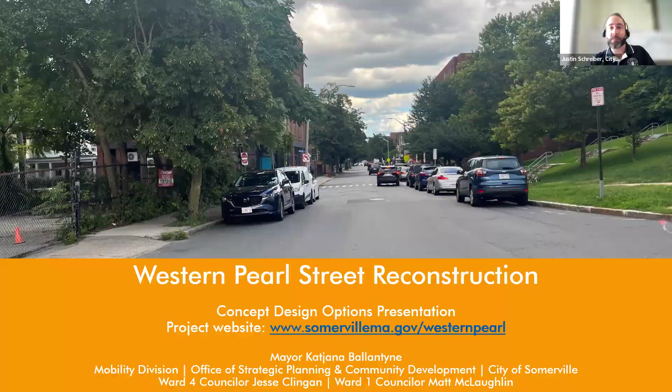For our presentation, we will first share a bit of information about who we are and what we do at the Mobility Division. Next, we'll talk about why Western Pearl Street was selected for construction and how our policy plans guide the design. We will then provide an overview of the project scope and anticipated timeline. Following that, we will share back some of the existing conditions data we have collected, as well as a summary of feedback we heard in the first phase of engagement last fall. We will also talk through some of the tools we can use to improve Western Pearl Street, then walk through two conceptual designs being proposed, and finally wrap up by discussing what's next and how you can continue to provide input into this project.

So first, who are we and what do we do? We want to start by introducing the team of city staff working on this project and discuss the values and guiding plans that we bring to our work on Western Pearl Street.

My name is Justin Schreiber, and I'm a senior planner with the Mobility Division. Also from Mobility, we have Viola Augustin, senior planner, and Kate White, transportation planner for outreach and engagement. We'll be working closely with the engineering division of the Department of Infrastructure and Asset Management, who will be responsible for the construction phase of this project. This includes Rebecca Wright, Senior Project Manager for Streetscapes, and Brian Postlewaite, Director of Engineering.

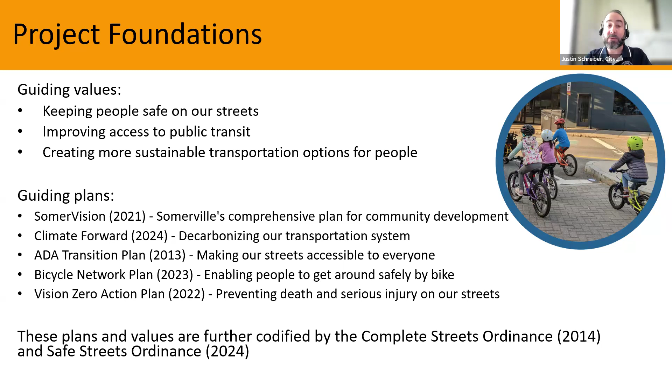Now I'll turn it over to Viola to talk about why this project was selected. Thank you, Justin. There are a few reasons why we are reconstructing Pearl Street from Medford Street to McGrath Highway right now.

Selected streets are categorized by project type. Complete street and intersection projects are full street reconstructions that include a complete reevaluation of street design to improve safety and access for all users. In full street projects, generally the surface of the street is renewed, but only minor traffic safety improvements are incorporated. In sidewalk-only projects, the city is simply reconstructing the sidewalks to be fully accessible. In curb-to-curb paving projects, the city is repaving the full roadway. And finally, in partial paving projects, the city is just repaving the travel lane areas of the roadway.

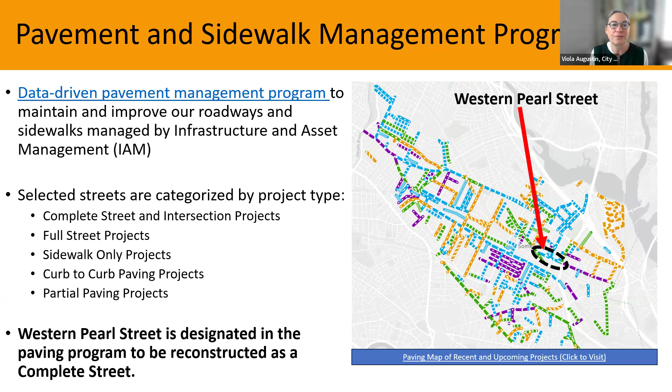The plan was further codified by the City Council's Safe Streets Ordinance in 2024.

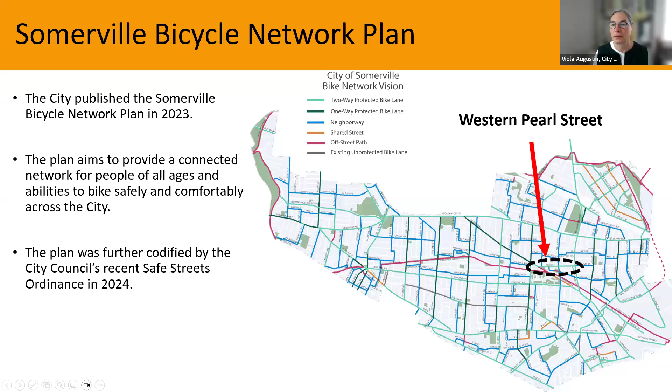We can see Western Pearl Street is designated for protected bike lanes in both directions, and it is on the priority network of streets to be implemented by 2030. Because of the narrow width of Pearl Street, providing bike lanes in each direction requires removal of all parking or one-waying the street. In our first round of outreach in the fall of 2024, we presented these two options and a third one to only provide a protected bike lane in one direction and keep parking on one side.

We asked community members to share thoughts and feedback. Later in this presentation, Kate will tell you what we heard from the community.

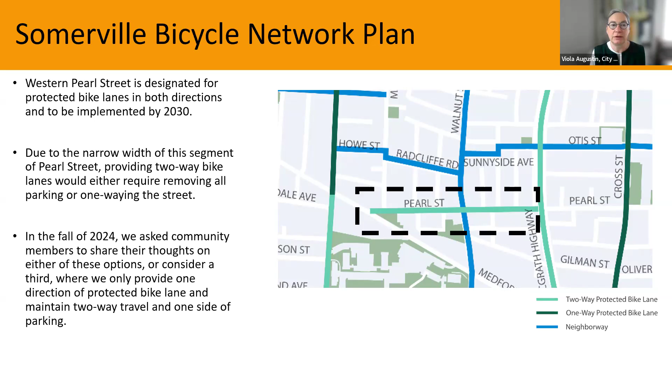What is the project? First, we want to clarify the scope. As shown on the map, the project will reconstruct Pearl Street from Medford Street to McGrath Highway. The intersection of Medford Street and Pearl Street is included. However, the project ends before Dana Street at the McGrath end.

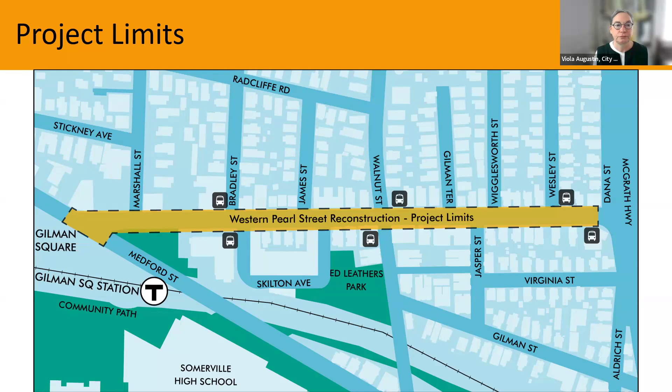Included in this project are reconstruction of sidewalks and curb ramps, repaving of streets from curb to curb, new tree plantings and landscape areas, new and raised crosswalks and intersections, traffic calming, traffic signal evaluation, designated bicycle facilities, bus stop changes, changes to lane widths, and increasing visibility at crossings.

What we can consider is parking regulations and traffic calming on nearby streets. What is not included in this Complete Streets project are substantial utility work, street lighting, network redesign, and green stormwater infrastructure.

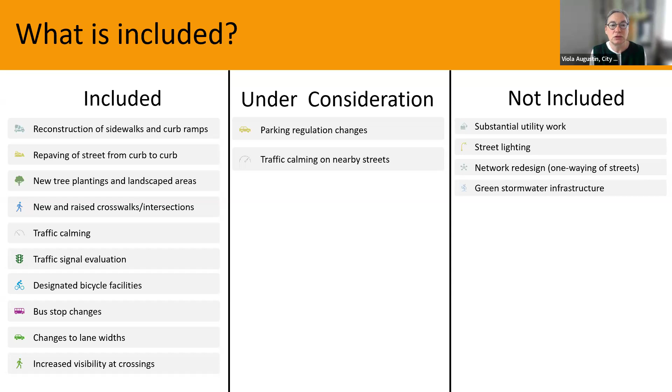In December of 2024, we started working with a consultant to develop 25% designs. The design development we are now sharing with the public, starting with an open house meeting we had on May 13th. After the second round of community outreach to get feedback on the proposed design in May and June, we anticipate developing one design to 80% completed, anticipated completion in July and August.

In September, we are planning to come back to the community with this 80% design. Again, we will be asking for feedback in September and October. Final 100% designs will be developed after that, until approximately the end of the year.

We then aim to introduce the 100% design at the beginning of 2026, and at the same time we are seeking bids for contractors. Construction is then anticipated to take place between spring of 2026 through the fall of 2027.

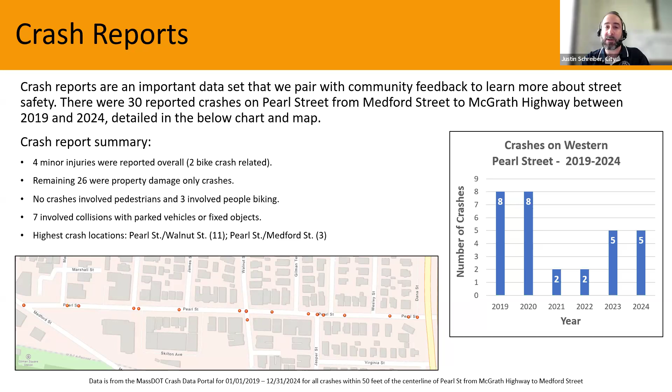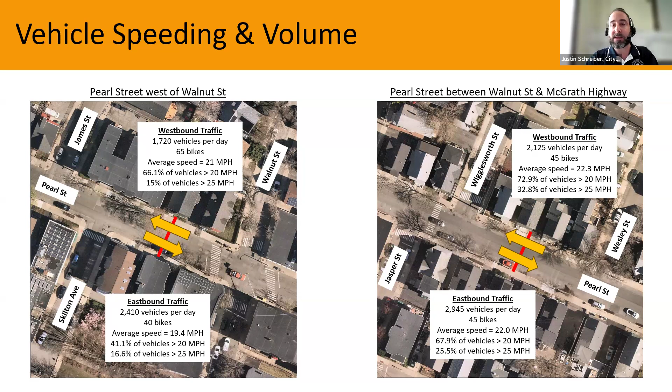The data also shows that a majority of people driving exceed the 20-mile-per-hour speed limit on Pearl Street, ranging from 41% to almost 73%, depending on location and direction. Between 15 and 33% of vehicles also exceed 25 miles per hour. Speeds appear to generally increase closer to McGrath Highway, and at both these locations, outlier speeds as high as 50 miles per hour were recorded.

We also collected data on crosswalk compliance and red light compliance. Over the course of 1 hour at 3 unsignalized crosswalks, 9 pedestrian vehicle interactions were observed, with 7 vehicles yielding and 2 vehicles failing to yield. And then again, over the course of 1 hour at the Walnut Street intersection, 1 vehicle ran the red light during the pedestrian phase. The study likely has too few data points to draw firm conclusions, but it is presented for context.

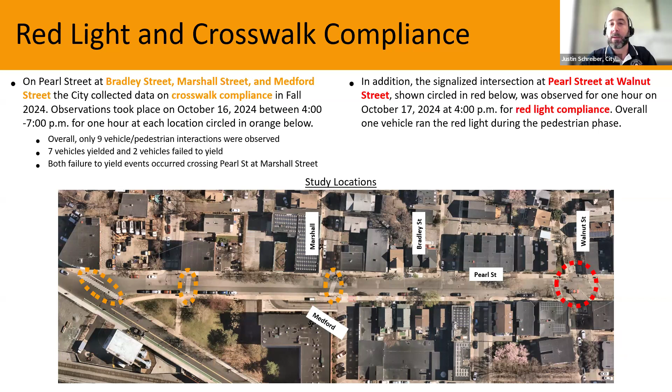Western Pearl Street is currently served by the MBTA 80 bus, which runs from Lechmere to Arlington Center about every 45 minutes during peak hours and about every 60 minutes off peak. On a typical weekday, approximately 200 people either started or ended a bus trip at the 3 stop pairs in the project area. In the outbound direction towards Arlington Center, the most popular stop is at Walnut Street with about 24 riders per day on weekdays.

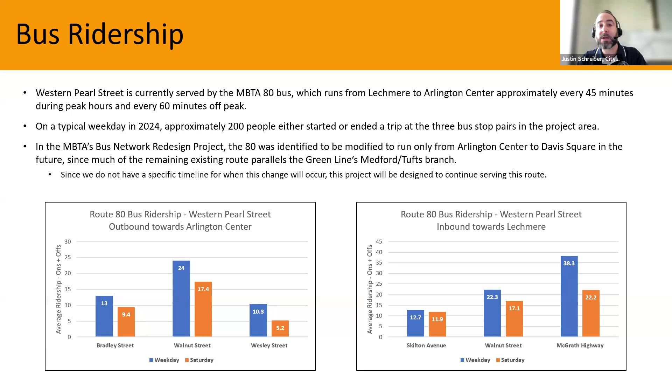And in the inbound direction toward Lechmere, the McGrath Highway stop is the most popular with about 38 riders per day on weekdays. In the MBTA's bus network redesign project, the 80 bus was identified to be modified to run only from Arlington Center to Davis Square in the future and not all the way to Lechmere, since much of the remaining existing route parallels the Green Line's Medford Tufts branch. However, since we don't have a specific timeline for when this change will occur, this project will be designed to continue serving this route.

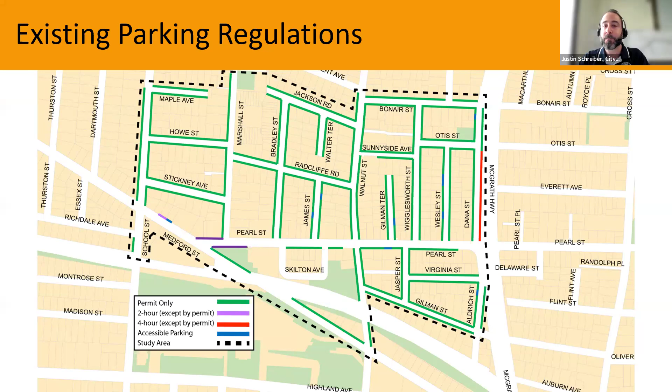The study area surrounded by the dotted black line includes capacity for approximately 750 vehicles across 29 different street segments. Overall, in the study area, about 80% occupancy was observed during that time, with 609 spaces occupied and 148 spaces available. We also saw that occupancy varied widely by street segment.

13 of the 29 street segments have 5 or more spaces available. 11 of the 29 street segments had between 1 and 4 spaces available, and 6 of the 29 street segments were at or over capacity. This study is not an exhaustive evaluation of parking in the neighborhood, but it does show that at a neighborhood level, at one of the highest occupancy times of the day, there remains available parking on many streets. However, this availability is not evenly spread, and there are a number of street segments at or over capacity.

I will now turn it over to Kate to provide a summary of our first phase of engagement.

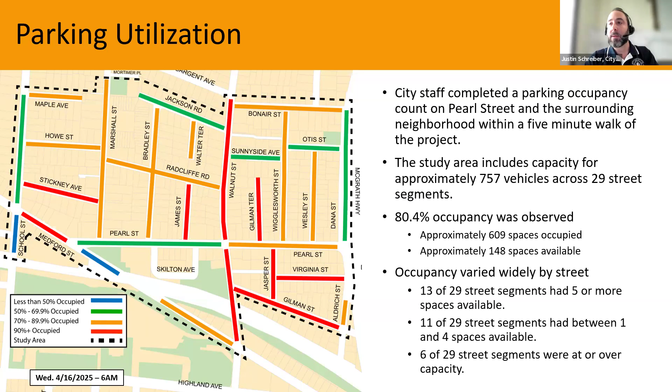Thanks, Justin. So from July 19th to November 20th of 2024, we worked to engage community members in this project. We aim to spread awareness about the construction project, including the opportunities and limitations in a pavement and sidewalk management program project, hear insight into how the streets in the project are used, learn about community members' transportation safety concerns, understand preferences among three design options, and gather feedback on ways to make the streets safer, more accessible, more sustainable, and more comfortable for all people traveling on the street.

If you'd like to learn more about how we engage community members and what we heard, please check out our pre-concept community engagement report available at somervillema.gov/WesternPearl. Over the next couple of slides, I'll provide highlights of our engagement activities and what we heard.

First, I'll focus on what we did. In the summer, we gathered with youth empowerment and climate justice organization Groundwork Somerville to host 3 street design workshops together, gathering young adult insight on safety issues and priorities for Pearl Street.

We then launched the larger pilot project by broadcasting the project overview and virtual community meeting details in tools like our mobility monthly newsletter on September 4th, sharing flyers at Mayor's Senior Picnic and Gilman Square Arts Festival, posting flyers on over 200 homes in the project area, and sending email notifications to City Alert subscribers within the project area.

In early October, we hosted the first community meeting and followed this with an outreach pop-up at the intersection of Medford Street and Pearl Street to spread the word about the project and again collect community feedback on their safety concerns and ideas. We hosted a dedicated on-site meeting for Pearl Street Park residents in mid-November and visited with small businesses with storefronts in the area.

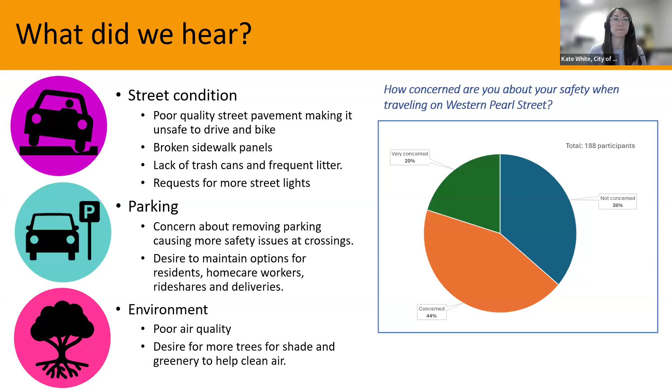Diving into some of the input we heard about specific intersections at Pearl Street and Medford Street, some of the major highlights included a desire to reduce speeding, increase stop sign compliance, and create a safe crossing across Medford Street, as a lot of people want to cross this location and there's not a crossing at this time.

Community members shared their concerns about low stop sign compliance on Pearl Street and described that there is poor visibility for people driving.

We heard requests for tools such as rectangular rapid flashing beacons, or RRFBs, or traffic lights.

Nearby, we also heard a lot of input about Pearl Street and Marshall Street. People described how they feel people don't yield to pedestrians trying to cross at either location. People also described how vehicles often sit on the crosswalk across Marshall Street to see other motor vehicles, rather than paying attention to pedestrians trying to cross.

We heard requests for tools such as raised crosswalks or RRFBs. And at Pearl Street and Walnut Street, we heard requests to move the crosswalk closer to the intersection, more in line with the desired path of travel, since it's currently set back. Some requested a raised intersection at this location. We heard concerns about red light running and aggressive driving behavior through the intersection, and some advocated for maintaining the signals there because they feel safer having their children cross at an intersection with traffic signals.

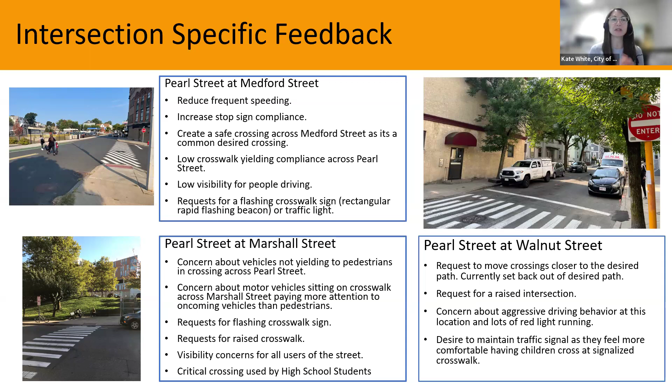So that's some of our intersection-specific feedback. We want to share some feedback we received about the three design options we presented last fall.

As Viola described earlier, Option 1 focuses on providing protected bike lanes in both directions, with flexible space—which precludes considering parking, curb extensions, wider sidewalks, and tree bump-outs. Option 2 offers one-way traffic in the street, providing protected bike lanes in both directions and flexible space for wider sidewalks and tree bump-outs. Option 3 includes a protected bike lane in one direction, flexible space, and two-way motor vehicle traffic.

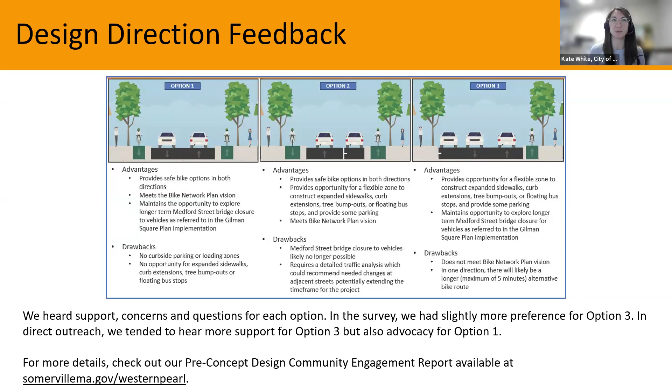We go into detail about what we heard regarding these three options in our pre-concept community engagement report, but in this presentation we'll highlight some of the major reasons people shared when picking an option preference.

We wanted to share what we heard across the board in our survey. About 25% preferred Option 1, 22% preferred Option 2, and 29% preferred Option 3. In direct outreach, we tended to hear support for both Option 1 and Option 3.

Some reasons folks preferred Option 1 were that it fulfilled the commitment in the Bicycle Network Plan and Safe Streets Ordinance, and provided bike facilities that could ease demand on the community path and connect to future protected facilities on McGrath Boulevard. Community members shared that they didn't want to prioritize parking over safety, and some were concerned about a one-way street removing the option to close the Medford Street Bridge to motor vehicle access.

Some reasons folks preferred Option 2 were that they supported reducing overall motor vehicle volume on the street. They liked having protected bike lanes and flexible space to enhance the pedestrian environment and transit experience, and hoped it could make the street feel more like a residential street.

Some reasons folks preferred Option 3 were concerns about no pullover space for deliveries and rideshares, which could encourage drivers to park in future protected bike lanes or block traffic.

Some who identified as bike riders living on or near Pearl Street described being satisfied with the existing Gilman Street neighborway as an east-west biking connection under McGrath Highway. They were more interested in strengthening that connection and the Marshall Street contraflow options, in addition to considering more traffic calming in the area.

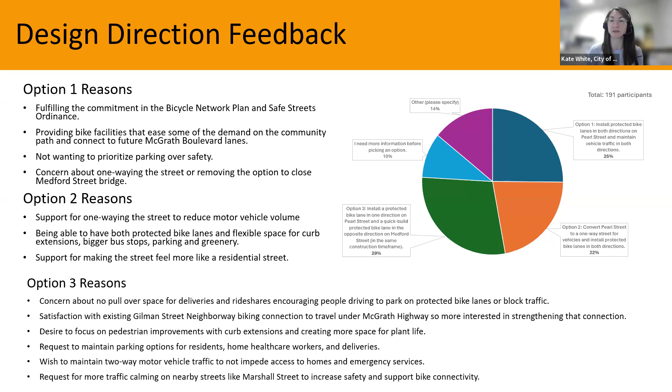Many wanted to focus the design on pedestrian improvements, with curb extensions and more space for plant life. Many requested maintaining parking options for residents, home health care workers, and deliveries. Some wished to maintain two-way motor vehicle traffic because they didn't want emergency services impeded or to have to always use McGrath Highway to access their home by car.

With all of that, we want to share what designs are being proposed. We'll first focus on some of the tools and features we can use to increase safety—specifically tools we can use in resurfacing projects.

One of our favorite tools we're excited to use in resurfacing projects is raised crosswalks at intersections. These make crossing the street safer and more comfortable. Since they're elevated to sidewalk height, drivers must slow down as they approach the crossing, and they also enable people using wheelchairs and other mobility devices to cross more easily, since you don't have to ramp down and back up.

Curb extensions are another tool that extend the sidewalk at the crossing to shorten the distance from one side of the street to the other.

They also help people driving to see people crossing and other vehicles by preventing vehicles from parking too close to the crossing. Another tool is our rectangular rapid flashing beacons, or RRFBs, which are push-button activated flashing crosswalk signs.

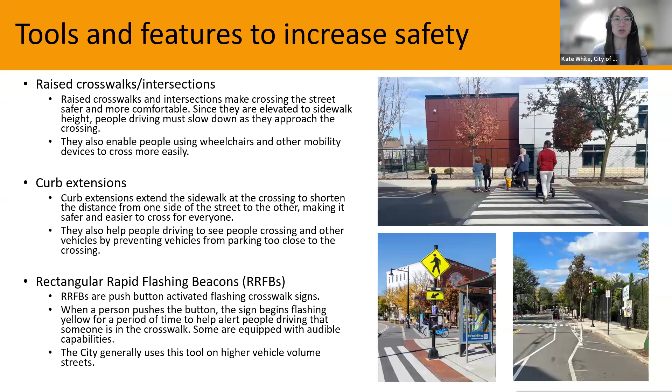Some other tools we can use are floating bus stops. These are sidewalk extensions that provide dedicated waiting space for bus riders outside the paths of travel for people walking, rolling, and biking. They streamline bus service and improve accessibility by enabling the bus to stop in the travel lane rather than having to pull over.

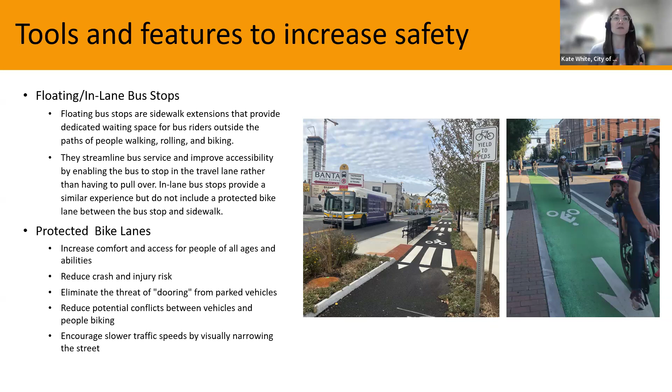In-lane bus stops provide a similar experience, but do not include a protected bike lane between the bus stop and the sidewalk. Protected bike lanes are another tool, and they increase comfort and access for people of all ages and abilities. They reduce crash and injury risks and eliminate the threat of dooring from parked vehicles. They also encourage slower traffic speeds by visually narrowing the street.

Another tool is clear corners. Parked vehicles near crosswalks can block views of people crossing the street and people driving on intersecting streets. So parking within 20 feet of a crossing is not permitted under local, state, and federal guidelines. By installing what we call clear corners, which includes using pavement markings and sometimes tools like flex posts, we restrict the parking ahead and can increase visibility for all users, as depicted in this visual where the cars are removed from the crossing and you can now see the children crossing and the people in the parallel crossing. This tool also helps reduce the likelihood of crashes.

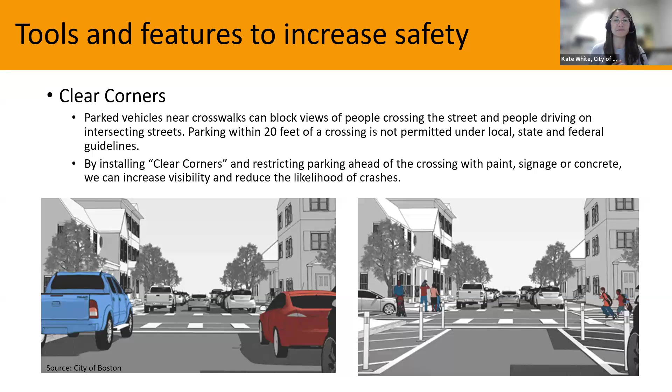The last tool I'll describe today is our parking regulations. We can change or adjust the types of parking we have available in the area by rethinking the regulations. At the next design update later this year, we'll share proposed parking regulation changes. This includes which side of the street parking will be located on, as well as changes to parking regulations to address the feedback we've been hearing about parking needs.

Regulation changes could include new accessible spaces for general use, new loading zones for business use and/or passenger pickup or drop-off near larger apartment buildings. We can have more 2-hour or 4-hour parking for users like visitors, customers, or home health aides. And we can consider parking meters to encourage turnover at high demand locations. In some cases, side streets could be used to meet demand for different regulations.

So that's a whole bunch of our tools. I'm now going to hand it over to Viola to share more about our proposed concept designs.

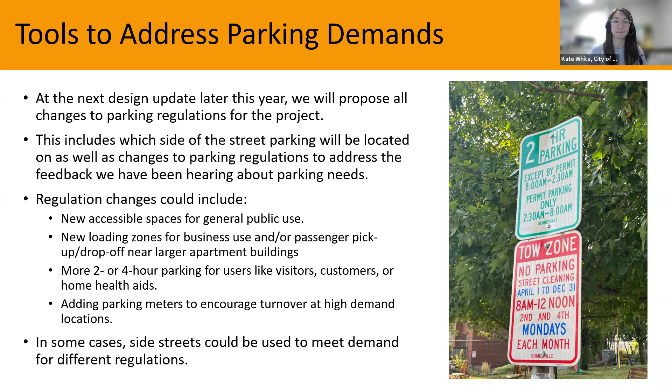Thank you, Kate. So now that we heard about safety tools we can use to improve safety, we want to go through two different ways or concepts that we propose to apply these tools throughout Pearl Street. Before we address the design details, I want to point out that we can combine parts of concept 1 with parts of concept 2 for the final design.

What that means is that if you like, for example, a bus stop treatment in one concept, but like the bicycle circulation in another concept, we can take that into consideration when we move towards one final design. So when you give feedback, please keep that in mind.

That said, both proposed concepts address many of the concerns we heard about. We are proposing curb extensions, raised crosswalks across side streets, and raised crosswalks at non-signalized intersections across Pearl Street to create safer intersections and crossings.

Both proposed concepts keep, wherever possible, parking on one side of the street, not unlike what you currently find on Pearl Street. You will see improved bus stops in concept 1 and concept 2. For example, some bus stops will remove conflicts with bike lanes, and some eliminate the need for buses to pull in and out of the travel lane, or in-lane bus stop, as Kate just described.

The two concepts also show two different treatments for bicycle infrastructure, but both have a continuous protected bike lane throughout most of Pearl Street, with one section of bike lanes in both directions. Now, before taking a look at what distinguishes both concepts, we want to explain why we made a decision to move forward with a combination of two-way bicycle lane and one-way bicycle lane.

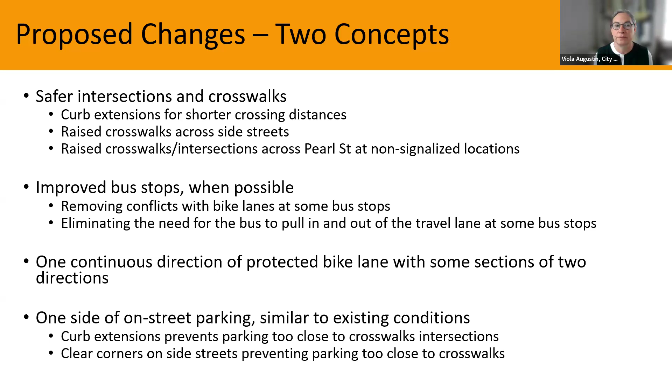All of our designs put safety first. Safety impacts have priority for all our street improvements. In addition to safety for vulnerable users of the street, we work with the fire department to ensure that they can operate in a fast and efficient manner.

Learning from other projects, we concluded that providing no curb access on Pearl Street would create significant safety issues. One option to achieve a continuous bike connection in both directions would be to one-way the street. This would force many residents living on one-way streets in the neighborhood onto McGrath Highway, and it would impede fast and efficient emergency operations. By choosing a design with a protected bike lane in one direction and an alternative route through adjacent residential streets in the other direction, we can build a safer street for every user.

We are able to incorporate sidewalk improvements, create a better pedestrian environment, and keep most parking on one side of the street.

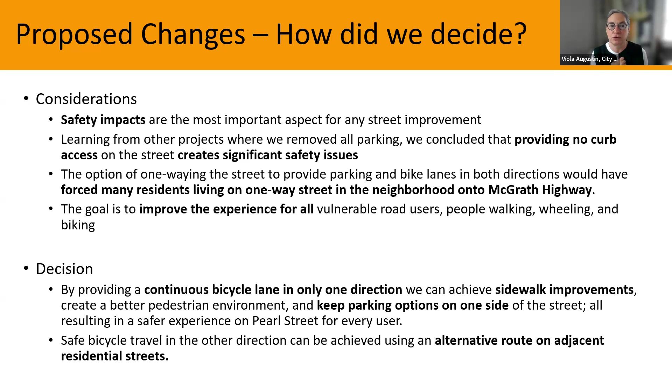So let's look closer at the two concepts and what we're proposing for bicycle facility configuration.

As you can see on the two maps, concept one has a continuous bike lane going eastbound from Medford Street to McGrath Highway. A two-way bike lane, shown in the green arrow, connects Medford Street and Skilton Avenue. After that, bicycle riders go eastbound, continuing on Pearl Street, indicated with the light blue arrow. Riders coming from McGrath Highway going westbound, shown with the red arrow towards Medford Street, turn left from McGrath Highway into Albright Street. From there, they turn right onto Gilman Street, then continue on this existing neighborway connection across Walnut Street, through Ed Leather Park, and travel on Skilton Avenue to come to the just mentioned two-way bicycle lane on Pearl Street connecting to Medford Street.

Concept 2 proposes a continuous bike lane going westbound, indicated with the red arrow, and eastbound travel from Medford Street, shown again with the light blue arrow. We are proposing for people riding bikes to continue up Medford Street Bridge, where they will turn left onto the community path until Walnut Street. They turn left onto the existing two-way bike lane and then right onto the current Gilman Street neighborway until Jasper Street, where they will turn left, then turn right on Pearl Street to the protected bike lane all the way to McGrath Highway.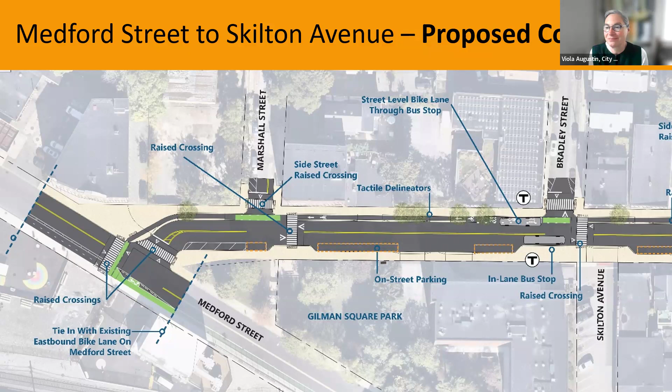Switching over to Concept 1, you can see the treatment for this section of Pearl Street, again between Skilton Avenue and Jasper Street. There is a sidewalk level, 1-way separated bike lane on the south side of Pearl Street, headed eastbound toward McGrath Highway. The bike lane returns to street level to cross Walnut Street and to pass through a bus stop, and then it returns to sidewalk level.

Raised crosswalks are shown across all side streets, as well as curb extensions into Pearl Street on the north side of the intersection to prevent people from parking too close to intersections.

At Walnut Street, curb extensions are shown on the north side, on both sides of Walnut, reducing crossing distances across Pearl Street. The westbound bus stop at Walnut Street is relocated after the intersection at one of these curb extensions.

This is an in-lane bus stop so that the bus does not need to pull in and out of the travel lane. Locating the bus stop so that the bus proceeds through the intersection before stopping allows it to operate more efficiently, since it does not need to stop twice, once at the bus stop and potentially again at a red light. This is known as a far side bus stop.

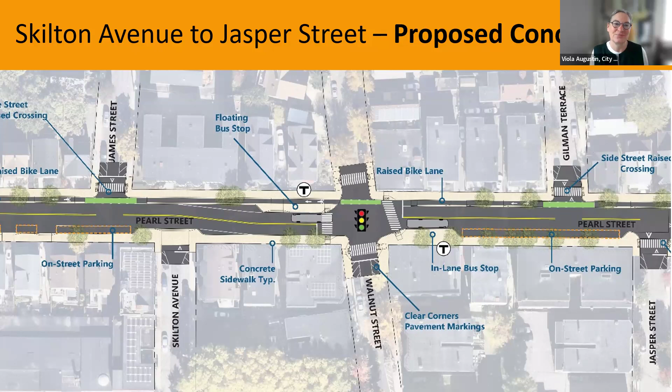Thank you, Justin. So the last section of Pearl Street is between Jasper Street and McGrath Highway / Dana Street. As we mentioned previously, the scope of this project ends at Dana Street. However, we are communicating with the DOT team to ensure that our designs will work with future changes on McGrath Highway. In this section, you see there's currently no parking on the north side and some parking on the south side closer to Jasper Street.

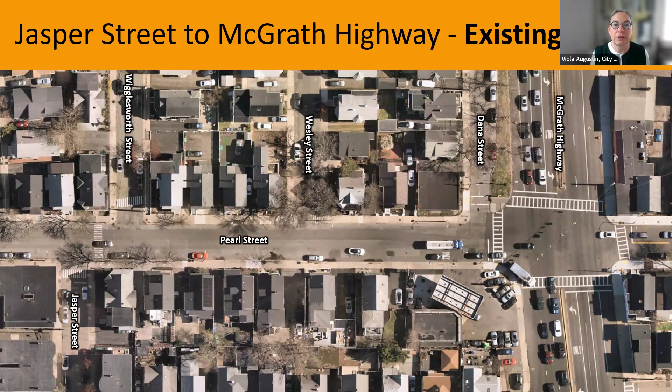The westbound bus stop on the north side is right before Wesley Street, and the eastbound bus stop on the south side is right across that.

In concept 1, the protected bike lane continues eastbound on sidewalk level until right before the intersection to McGrath, where it transitions to street level and shares the lane with the pullover bus stop. The bus stop for the bus heading west towards Gilman Square stays in the same location as where it is now, but a curb extension creates more space for waiting and allows for easier bus operations as the bus does not have to pull over.

The bus stop eastbound moves closer to McGrath Highway, away from residential driveways, and it will be in front of the gas station. Parking shifts to the north side in this concept. Raised crosswalks are added across all side streets, Wigglesworth, Wesley, and Jasper Street, and the right turning lane is eliminated. Again, this is coordinated with the DOT team for the McGrath Highway project.

Concept 2 proposes a bike lane in each direction in this section. The same bike lane treatment as in concept 1 is shown on the south side, going eastbound. That is on sidewalk level between Jasper Street and the bus stop, and then it turns into a shared lane with the bus stop on street level in front of the gas station at the intersection of McGrath Highway.

On the north side, we propose to continue a sidewalk level bicycle lane from Wigglesworth Street until the westbound bus stop at the corner of Dana Street, where it then goes onto street level. Same as in concept 1, all side streets show raised crosswalks and the right turn lane onto McGrath Highway is gone.

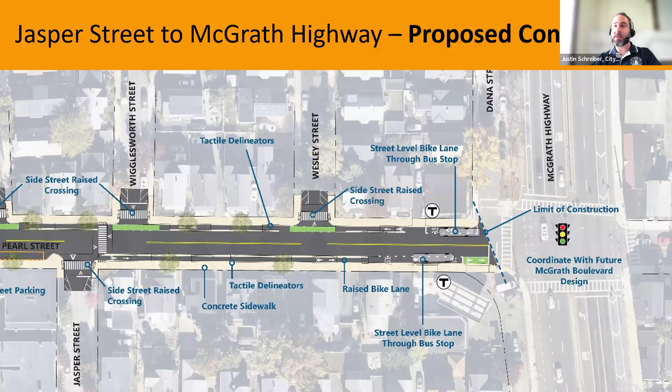Now, with all that information just shared, Justin will give an overview of all of them. Thanks, Viola. So that was a lot of information. So this next slide is really trying to summarize the major differences between the two concepts that we presented just now.

So first, the bike circulation. In concept one, it's primarily an eastbound bike lane, except for a two-way section between Medford Street and Skilton Avenue, which is shown as a two-way bike lane on the south side of the street. And then again, to serve the westbound direction of bike travel, we have proposed a route that uses a short section of McGrath Highway and Aldrich Street, and then the Gilman Street, Skilton Ave neighborway to connect up to the two-way facility on Pearl Street.

In comparison, the bike circulation in concept two is primarily a one-way westbound bike lane, except for a two-way section between Jasper Street and McGrath Highway, shown as two one-way bike lanes on each side of the street. To serve the eastbound direction, we have a proposed route that uses Medford Street up the bridge, one block of the community path, the existing two-way bike lane on Walnut Street, and then back to Gilman Street neighborway and Jasper Street to connect to the short section of one-way eastbound bike lane on Pearl Street.

Moving on to parking, concept one shows parking on the westbound or north side of the street, while concept two shows parking on the eastbound or south side of the street. The parking is always on the opposite side of the street from where the bike facility is.

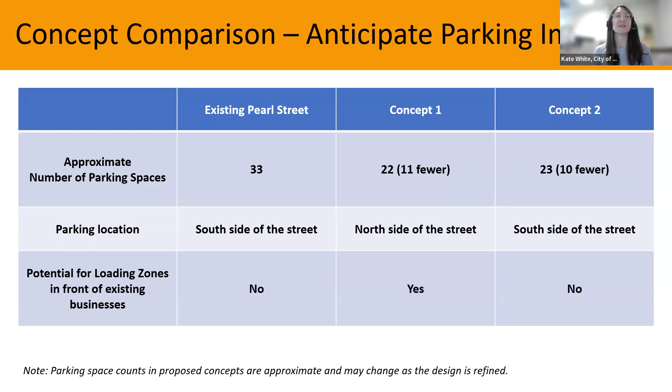Thanks, Justin. I'll now describe some next steps. We want to talk through how your input will shape this project. We really want to hear from you, including your feedback on the concept designs we've presented in this phase.

So from May to June, please share with us which concept you prefer and if you have any specific preferences for the different intersections and circulation options. We also want to hear your overall feedback and questions on the proposal.

As Viola described earlier, we'll work over the summer to incorporate this feedback into the updated design. So when we come back in the fall, we'll bring that updated design back to you to gather feedback on whether we met our goals and if we're missing any more details before we finalize and work towards construction.

Then into next winter, we'll share the final design as we work to attain a contractor and get a construction schedule. At this stage, when we're going out to bid for that contractor, we won't be collecting feedback to make changes to design, but focusing more on fielding clarifying questions.

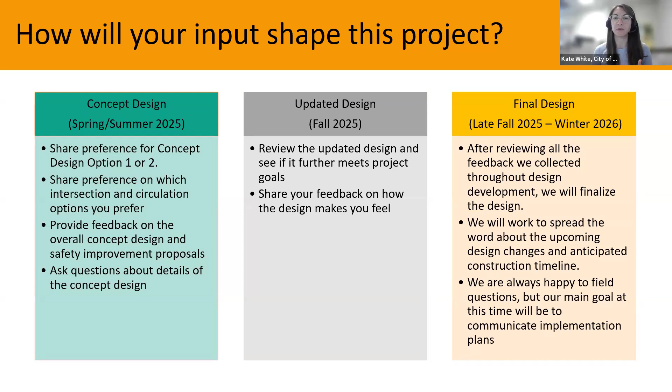We want to highlight the overall picture of all the different ways we aim to engage community members. We spoke about some of those we shared when preparing to develop the concept design. We'll continue to use similar tools, such as virtual office hours, tabling at local community events like Carnival coming up on June 1st, in-person direct outreach, and online survey opportunities. We'll also continue to connect with our transportation-focused city advisory committees and spread the word about the project in major city communications channels. So what comes next?

From now until June 13th, please consider taking our concept design feedback survey. This is available at somervillema.gov/WesternPearl, and it's available in English, Spanish, Nepali, Haitian Creole, traditional Chinese, and simplified Chinese.

If you prefer to take this over the phone, please don't hesitate to call 311. They'll log it with a member of our staff who will then return your call and take the survey with you.

Consider coming and talking to us. We've got some outreach pop-ups on May 19th from 4:30 to 6:30, and we'll also be tabling at Carnival from 2 p.m. to 6 p.m. on June 1st.

We're hosting two virtual office hours over the next couple weeks. One available on May 22nd from 5:30 p.m. to 6:30 p.m., and the second is a lunchtime option on June 11th from 12 p.m. to 1 p.m. You can register in advance for these virtual office hours at our project website.